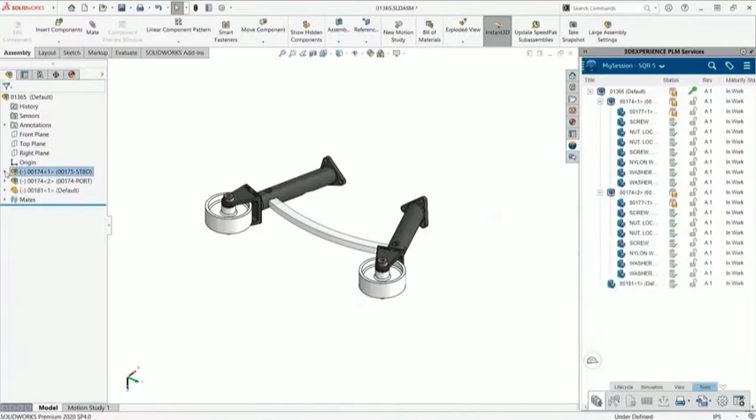Connect, collaborate, and tackle more challenges together. Sit back and take in everything new in SolidWorks 2021 and 3D Experience Works. I can't wait to meet you on the platform.

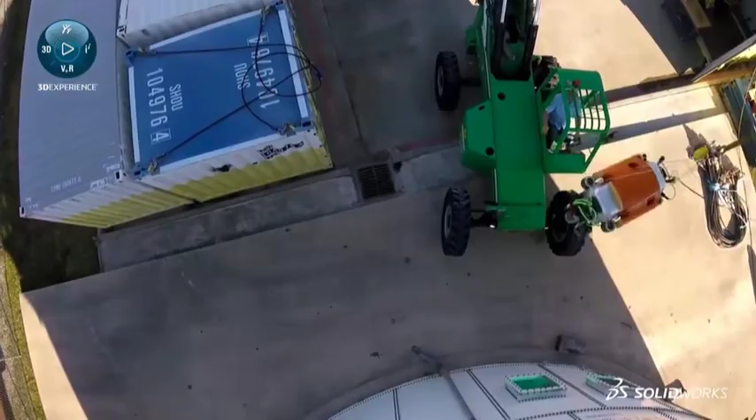Tackling the inspection of dark, harsh, and sensitive environments is the specialty of Square Robot, a startup based out of Boston, Massachusetts. Using advanced submersible robotics lowered into a petroleum storage tank, they autonomously inspect these environments for defects in the storage vessel using state-of-the-art sensing technology. By being able to use robotics for this task, they have reduced costs for their customers while improving accuracy.

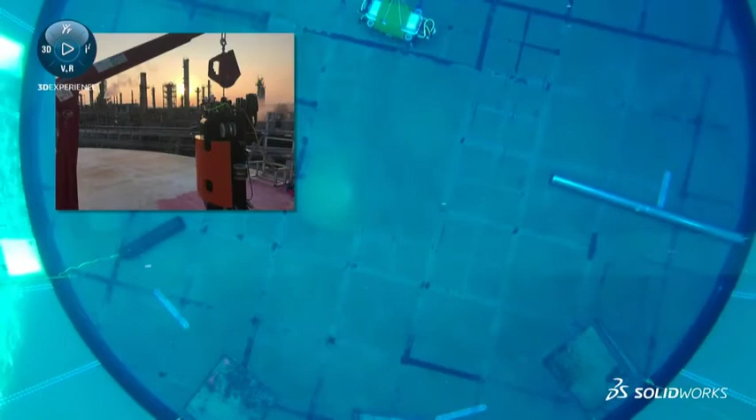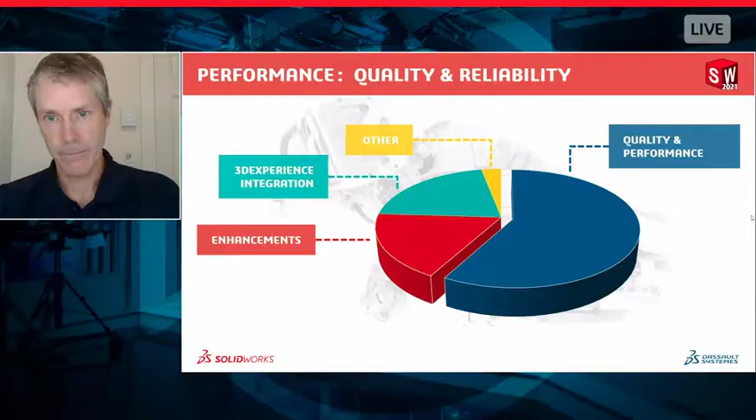Sure. I think the next slide shows bugs come in and they have all different kinds of bug type. Maybe it's a workflow bug, maybe it's a behavior bug where it's not functioning properly. So there's all different levels of bugs, and we try to categorize things so it helps us prioritize what to work on. And we have other metrics that help us prioritize related to the number of customer hits on a bug and how critical it is and so forth.

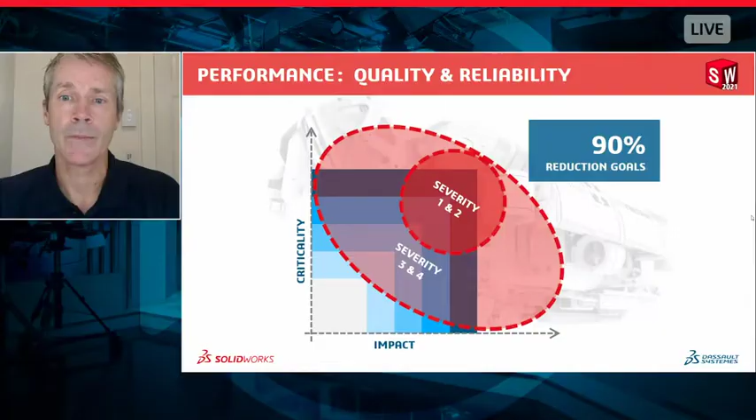You've shared some feedback with me and some data with me over the past about what this means in terms of our investment into this, and customers will really gain an immediate benefit from this. One of the things that we see this year is a substantial increase in the number of these bugs that you guys have closed.

So these aren't necessarily things that have a button associated with them or a feature associated with them. This is really just the software responding and acting more how our customers anticipate it will. Is that correct? Can you clarify that a little bit? These aren't necessarily features that improve performance or quality. These are just fundamentally making the software work better, correct?

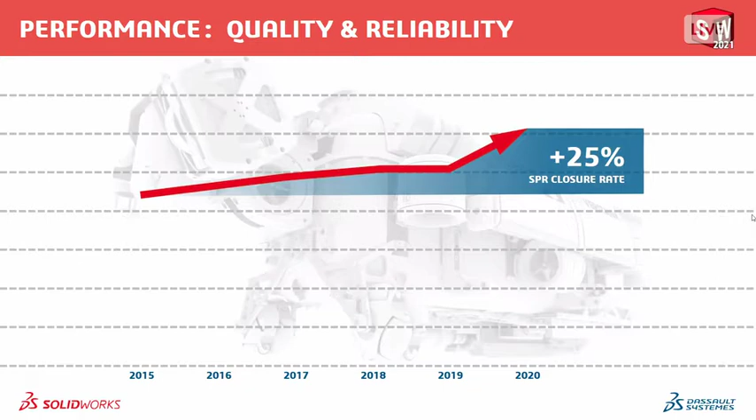True. Yeah. What we're showing here is really bug related stuff, not necessarily performance. There are performance bugs, but this is a graph showing the quality related stuff. And I looked back at it to see how we're doing with this renewed focus here. And I looked back 10 years. Developers have actually fixed more bugs in the past year than any time in the past 10 years. And you can see the graphic here. We're not showing 10 years, but a 25% increase over what you might have felt 5 years ago.

That's going to make for an amazing release for everybody using the software. Now, one of the things that we also want to talk about is performance. And something we introduced last year was something called enhanced graphics performance. Now, this is something that last year was an optional feature inside of the software that you could enable or disable. Can you tell the viewers at home who maybe don't have SolidWorks 2020 yet, or maybe haven't enabled this, kind of what enhanced graphics performance is?

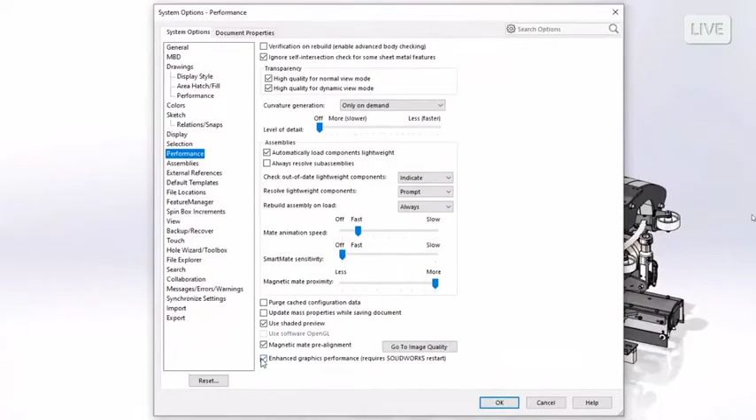Sure. Yeah. So we took a multi-year effort to basically re-architect our entire graphics engine, and that's what you would see in the model screen area, not the UI. It's the part and assembly display window. So we've re-architected that. We've had a team of people working on this for quite a while. As Jeremy said, we rolled it out. Actually, we rolled it out as beta in the software in 2019. It's available to everyone in 2020. You can turn it on. And in 2021, it is on by default now.

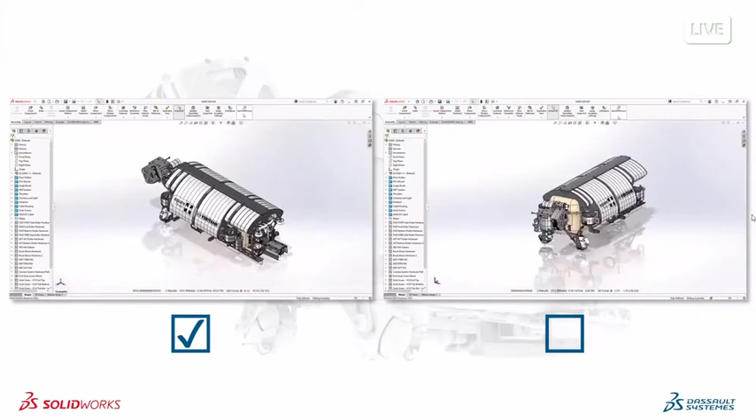And you can see here some of the performance improvements. So the graphics team has done a fantastic job. And what you will see is a performance improvement. That's the biggest impact that customers will see. Yeah, so if you haven't enabled graphics performance, I highly encourage you to do it. You'll see a lot of places in the software where it's being impacted.

New in SolidWorks 2021, we're continuing to augment enhanced graphics performance. One of the new things that we've seen is better leveraging the GPU for calculating things like silhouette edges. I believe that's one of the new things here as well, and hidden lines removed and hidden lines visible mode. So, kind of like what you saw there, we're continuing to invest in this technology. I mean, that's the plan moving forward, right, John? We're going to continue to invest in this graphics performance technology.

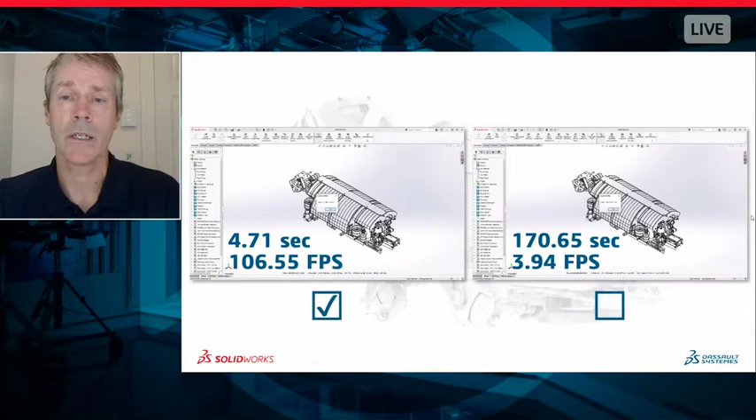Yeah, absolutely. Sid and the graphics team already have a plan. We're starting up on the next major release, and we've been enhancing it since we released it last year. So in 2021, we've added the occlusion culling, and we've improved the silhouette edges that you mentioned, done on the GPU, and we've done the re-architecture for drawings as well. So you'll see a very large improvement in the performance for drawings.

Yeah, so occlusion culling is interesting. The video we had on screen is actually something with a special developer option, where we were able to freeze what was being rendered on screen. So it's actually really intelligent. So not only are we letting the graphics card handle a lot more of the work being done, but we're also being much more intelligent about how we're doing things there.

You had also mentioned drawings as being an area that we're focused on. New in SolidWorks 2021, all this great technology is now being handled in the drawings environment as well. So users who are doing large complex drawings, you're sure to see massive graphical performance gains while you're working inside of your drawings. This is just an example again of what it kind of felt like without graphics performance enabled and what it looks like with graphics performance enabled.

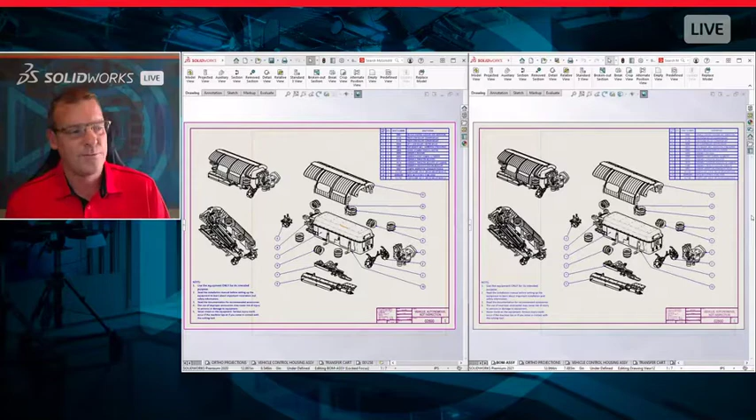This is really cool stuff, John. I know that Sid is really the guy responsible for this, but I think you've iterated it. This has been a long-term commitment, and I think our customers are really going to benefit from this for the long haul in what we're investing into this.

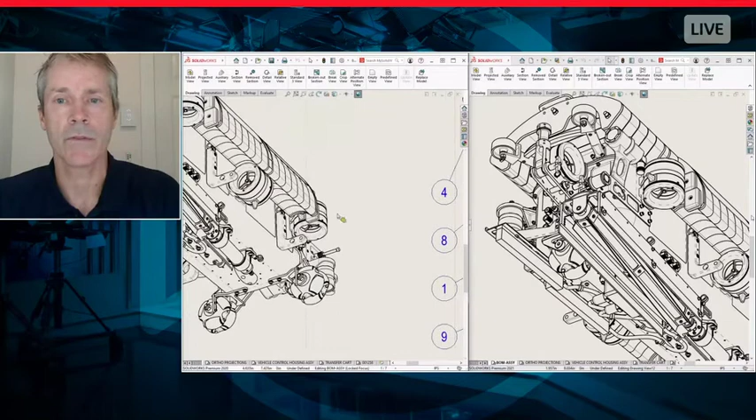Yeah, we've got a great team working on it, and it's been a huge focus for us for the past couple of years. And it's really nice to see it hitting the street, and on by default is great, and we've seen a lot of feedback during beta. And people are feeling it. You're gonna feel these performance improvements this year, especially in drawings, since it wasn't even enabled last year.

Yeah, so for anybody who is interested in learning more about this, you will want to make sure that you have the latest certified graphics drivers for your certified graphics card enabled. You can go to the SolidWorks support webpage to check that your graphics card has the latest graphics driver. I believe OpenGL 4.5 is the one requirement that you have to have in your graphics driver to really take advantage of all of this.

So, yeah, John, this is really exciting. I mean, go ahead. I think you mentioned it already, but it will take advantage of the GPU, which is a change compared to several years ago, right? We wouldn't always take full advantage of the GPU. So the better card you have, the better performance you're going to get. We are maximizing the GPU, which is a critical piece of your machine.

Yeah, customers who invest in a really strong and powerful graphics card are definitely going to see big performance increases with this.

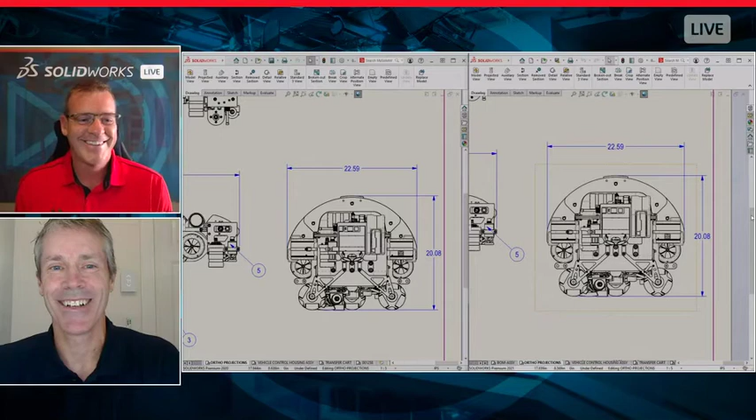So, John, you guys are kind of at the end. You guys are wrapping up your development cycle for SolidWorks 2021. Do you get to rest, or what's happening now? Or are you diving right into the next release? We are diving in. We have our R&D kickoff meeting on Monday for what we're planning to do with 2022. So the planning is done for the first portion of it, and we're starting work next week. So exciting! All right, keep going, John. Well, yeah, I mean, it never ends.

Well, hopefully we have you here again next year when we're looking at SolidWorks 2022 at this time. Really excited for this release. Let's not worry about what's going to happen a year from now. Let's focus on the great release here. John, I want to thank you for being here.

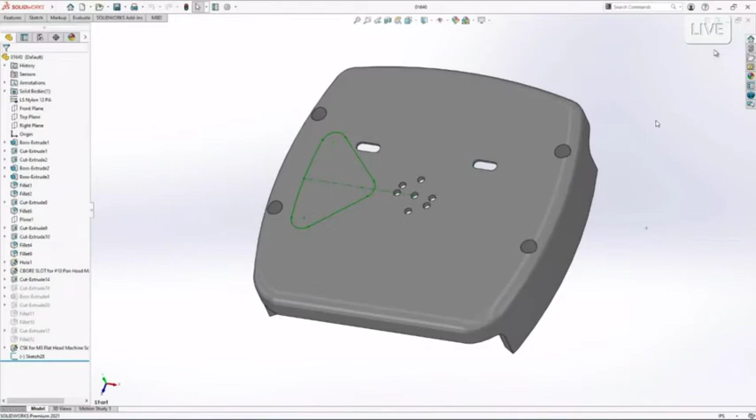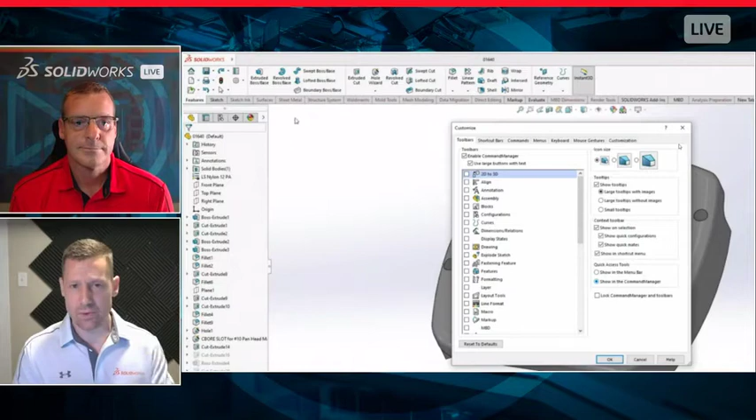If we want to get even more stealthy, there are some items at the top of the screen, our quick access tools, that we might also want to remove from the user interface to reduce clutter. So here we can put those in the command manager now, and those are hidden from the screen as well, minimizing our user interface. Now, like you said, we still have access to all of our tools at the top of the screen, but a better, faster way to work is using the S key keyboard shortcut, which most users will be familiar with.

New in SolidWorks 2021 is the ability to search for these commands, rather than having to pick through a big list of commands. So we can search through those. We can add commands like the circular pattern to our toolbar. We can customize our toolbar all over the user interface very simply.

And so here you can see I'm ready to work. I've got all my commands right where I need them, right at my fingertips, using that S key keyboard shortcut. That is so convenient. There's so many times where we're wanting to customize our interface. We're looking for the command that we want to add to the shortcut menu. This makes it so much easier.

And for those who might not know this, you not only have the shortcut menu, but you also have command search in the upper right-hand corner. This just really brings that whole, I don't need to move my cursor all over the screen. It's really going to make me focused in on my work.

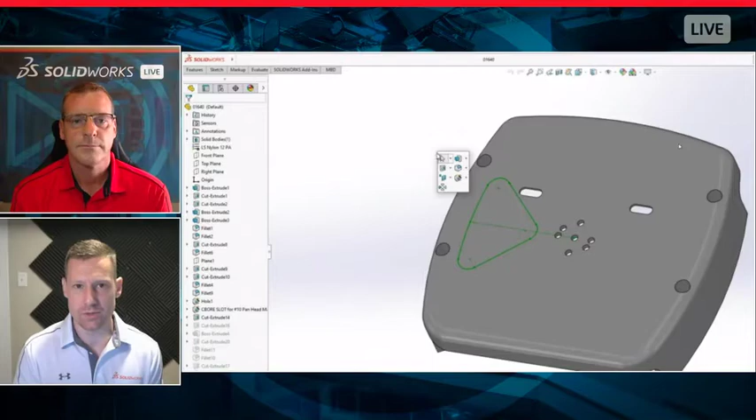Absolutely. And yeah, as you'll watch me perform some of these tasks here, I'm only going to use that S key shortcut toolbar, as well as a right click menu. So here I'm just going to create that cut pretty quickly, through all, and then we'll use again our S key keyboard shortcut here to pattern that around that face and confirm that.

So not only do we not have to go back up to the command manager to grab those tools, because we were able to effectively customize our user interface, but I was really able, like you said, to just focus in on my design and get to work and be very productive with that.

So now I see why you actually hid the command manager with that new option. That's because you're able to just do so much with the shortcut menu right there. You really didn't even need to access the command manager while you were doing that.

Yeah, that's right. And one last thing, and I really like this, I use undo all the time because I'm not perfect. I make a lot of mistakes when I'm modeling, but something that's really exciting here in SolidWorks 2021 is that if you undo a feature, maybe one too many, you have redo now. So you can just get those features right back. You don't have to recreate them, and that saves a lot of time.

Yeah, I think users will really appreciate that. I know when we introduced unlimited undo all the way back to when you did the file open, users were really excited about that. And I'm going to assume we can use the hotkeys Control Z and Control Y here. But I remember you could just undo and you'd accidentally go too far. So now you're saying I can roll that back forward if I had accidentally done that. That seems like a really useful thing for people who get a little zealous with a keyboard.

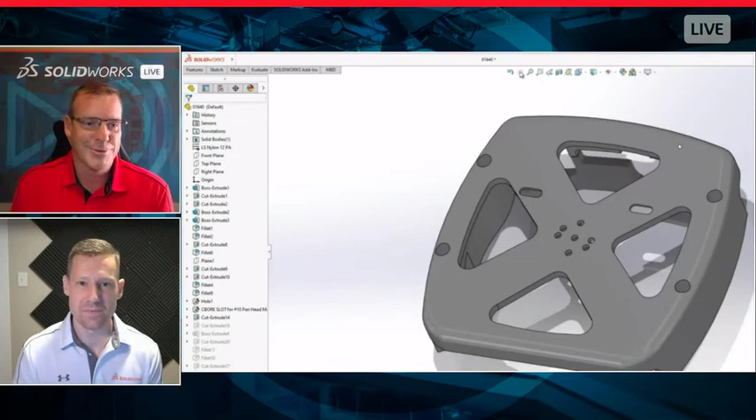Yeah, and this works for most commands in the part environment. So we have 60 plus commands that this works on. So with all of those enhancements, we're really just trying to help new users and advanced users alike customize and adjust their user interface to their liking, so they can just really focus in on their design and be super productive.

Very cool. Well, one of the things we mentioned early on in the broadcast is we don't have the time to show every new feature coming in SolidWorks 2021. So when it comes to the user interface, Mark, was there anything you didn't get to show here that you would encourage people to go attend a reseller event to learn a little bit more about?

Yeah, there's definitely one. There's this mechanism now where when you want to edit a dimension, instead of opening the property manager first, it just opens the modify dialog first. And it sounds like a small thing, but because you perform that action so many times in a session, even just a couple of seconds here and there really adds up to a lot of time saved. It's a really amazing enhancement, something we didn't show today. And there's a bunch more.

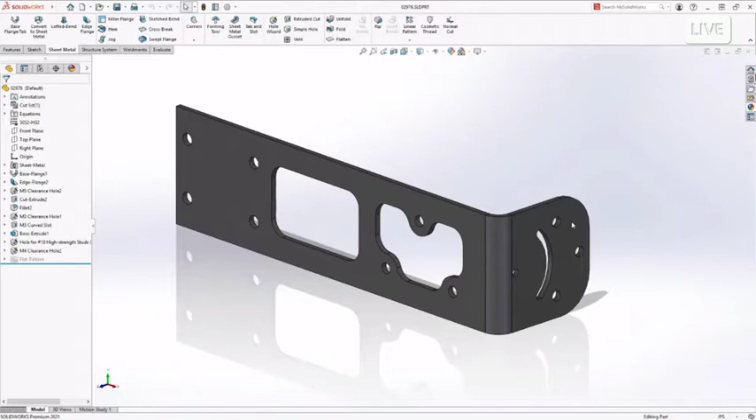Yeah, so let's go ahead and get started. In the area of curved edge flange, we've always been able to create curved edge flanges, but those curved edge flanges had to originate from a planar face, like those ones on the right there. Now in SolidWorks 2021, these curved edge flanges can be created even around areas like the bend area there. So you can see the curved edge flange, we get a nice, beautiful preview showing how that's going to go. So non-planar, curved edges around non-planar faces, you're going to be able to create those.

All your customization tools are available, your position, your dimension control, all that stuff is there. So this is really good. It'll really stiffen this bracket, and we know there's going to be some stretch in that area, but this is what customers really wanted. Of course, we can flatten this and send it out to DXF, or send it over to fabrication. So that new curved edge flange, something customers have been asking for a long time, is really valuable.

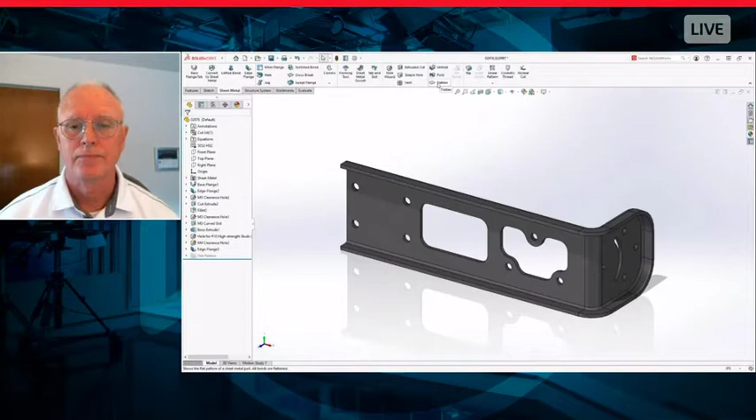Yeah, this is going to open up a lot of new design possibilities for our customers, being able to overcome some challenges that maybe they had in the past. Are there any other examples you can think of where the curved edge flange is going to come in handy?

Yeah, so that's a really good example for when you're trying to stiffen a bracket. In that case, we're adding a lot of stiffness to that bracket. It's also good for things like enclosures or covers. In this case here, we want to protect the electronic equipment on the inside.

These are fully editable. We have some curved edge flanges in here, so just change the flange length, change the direction, change the angle. Everything is fully editable, just like any other edge flange you're used to. And of course, we can flatten this as well, and you're going to get the correct flat pattern so that you can go ahead and manufacture this part.

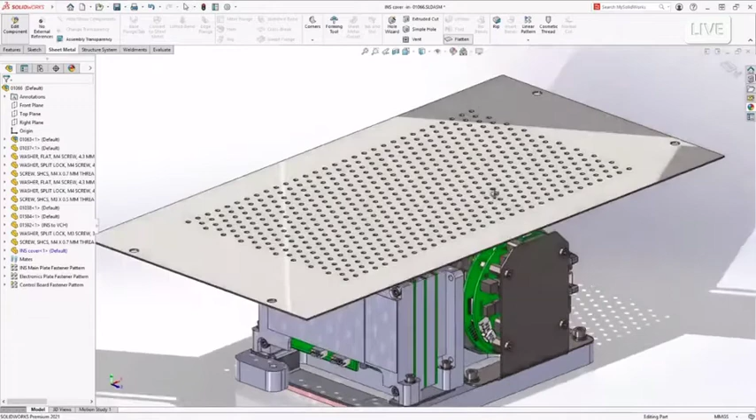Well, this is some really cool stuff, Mark. I like the sheet metal environment a lot, but I have to say, early on you mentioned the weldment environment as well, and I really, really like the weldment environment. What are some of the new things that users can expect in 2021 when it comes to working with weldments?

Well, we've got a couple of things I want to show here. When you're working with weldments, it's common to use multiple weldment profiles. Here we have a 2x2 square tube, and the rest of them are 2x3 rectangular tube. And we've always had this great tool to do your corner trims. In this case, we have two end butt types where you can see how they trim to each other in the different areas.

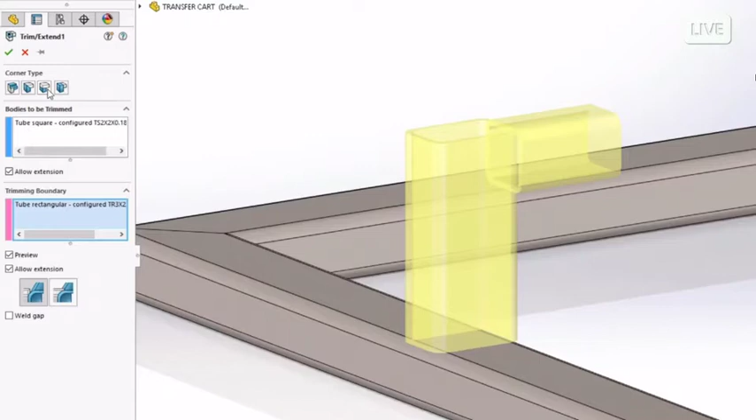But we also have a miter trim. This was always problematic when you were miter trimming two cross sections of different members, two members of different cross section. Now we have a new option in the property manager that's called a flush miter trim.

Full flush miter. So you can see what happens when we do that.

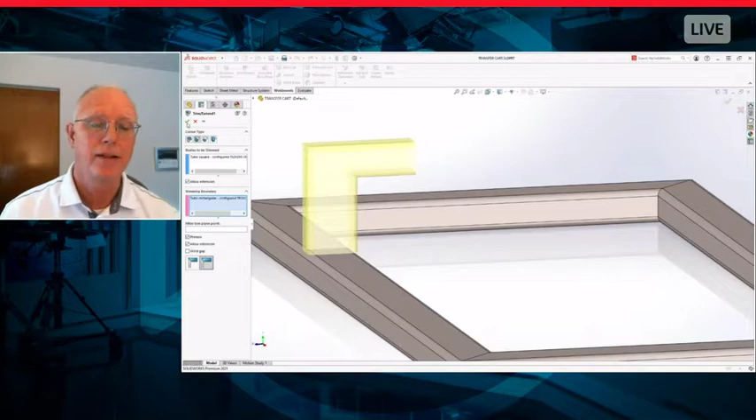Think about all the time that was saved when you tried to create these in the past. If you had that equal angle miter trim, you had to go back and say, I don't want it to be equal angle, I just want to make those two tubes flush. So you had to do extra work, sketch and cut those two bodies individually. Now it's just another option in the miter trim tool. That's really, really pretty cool.

That's a big time saver, talking about the workflow you used to have to do there. Not only that, it creates all these other features that you then have to manage. I love how this is all contained right within that mitered feature. It's really going to simplify things.

Now, Mark, you had also mentioned the ability to do some cool stuff with the user interface here. For this particular part, let's say we want to paint it a specific color. We can go into the color palette and choose any variety of colors, have multiple color palettes, choose from the spectrum down there and define our color. If we know the RGB colors, we can key those in. But oftentimes this color is specified by a customer.

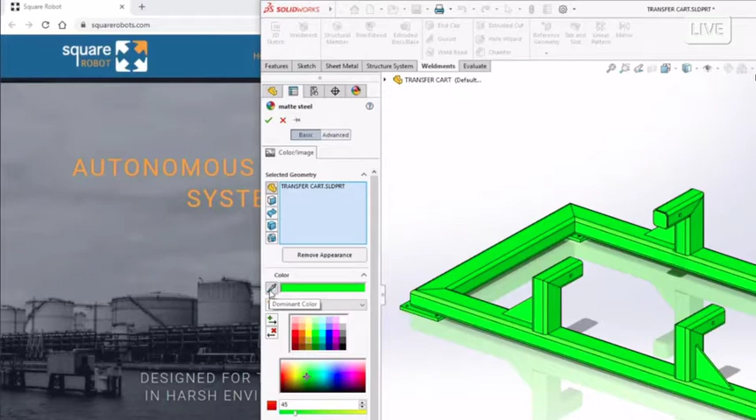Here we have the Square Robot webpage. You go on their webpage, read about their products and initiatives, but that color right up there is the one that I'm really interested in. So now in SolidWorks 2021, we have this new option, a little eyedropper there, a color picker. I can just go ahead and grab that, drag it onto the color on that web page or any image that you have, and it's going to apply that color. No need to use a third-party program or extract RGB colors.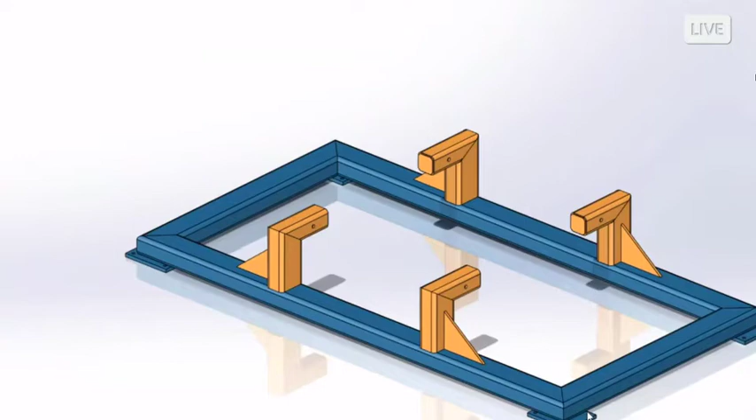Customers, it seems like from the forums and some of the beta events and different events that we've done so far, a lot of people are really interested in having these custom properties with equations in them. In the past, you maybe created global variables and used the equations tool inside the property manager, then mapped that to a custom property. But in reality, it was a bit of a workaround.

Yeah, I mean, this really opens up whole new possibilities. Now, you had mentioned when you started this, you said cut lists as well. So we can use these in cut lists also?

Sure. We got a weldment here, and you can see there's 4 plates on the 4 corners of that. I want to know the total length of all those plates together so I can order the proper material. So here we'll just use a total length equation, and we'll multiply the quantity of plates times the actual length - these are just the bounding box length calculated from the cut list - and we come up with a little over 20 inches of that plate that I need to buy.

So that's very important, that information is there. Right in your equations, right there in your custom property, so you can capture this information. It can then go on your bill of material for those items as well. So that's really powerful there. It's just saving a lot of time of having to do all that extra work, maybe in the bill of material or in your equations in the property manager or in the feature manager.

Yeah, I recently had the chance to play with this, and it's really cool because now that custom properties are solving for an equated value and you have the number value, I've actually found you can also reference custom properties in equations now, so you can kind of go back and forth with them. There's a lot of things you can do.

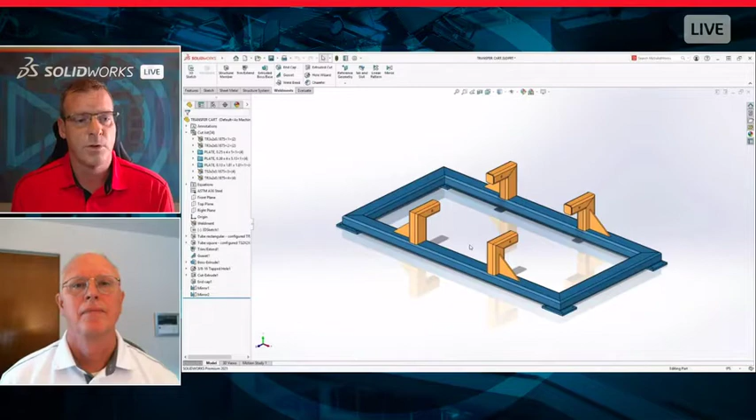Yeah, we did some things with the structure system tool. If you remember when I did the flush miter trim earlier with the weldments, that was something that actually existed in the structure system tool. And when you build structure systems, one of the benefits is you can put all different types of weldment profiles in there, and it doesn't really worry about it - it does that flush miter trim. But I do like working in structure system for big, large structures, and it's very good.

And now in SolidWorks 2021, there's a new manipulator that allows you to position individual structure members much easier than it was in the past. So, like you said, take a look, go visit one of your reseller events and make sure that you take a look at that new capability for that new manipulator for structure systems. It's really kind of fun to use.

All right, Mark, well, everything you shared with us seemed like it was a big time saver for everybody right now. What I want to do is, I think we're going to come back to you in a little bit to talk about drawings. I want to go back to Mark Peterson to talk a little bit about assembly. So we're kind of doing this user interface, parts, assemblies, drawings. Mark Peterson, welcome back. Hey Jeremy, thanks for welcoming me back to talk about some assembly enhancements.

Yeah, so I think assemblies are one of these areas that people, at least I do, I feel like that's the fun part of SolidWorks - building assemblies, getting to kind of see how all your designs come to life. What are some of the new things that users can experience in assemblies in SolidWorks 2021?

So let's get started by looking at this particular subassembly here. The bottom right-hand corner, you see a group of socket head cap screw and a washer, and we've mated that to the surface of this part. However, as you can see, it's kind of flipped the wrong way. So we want to flip that around. And naturally, for many of our SolidWorks users out there, we're going to go and flip that mate alignment. We're going to get this dialog.

And a lot of times, it would make sense for us to just click one of these buttons and get it out of our way. It depends on your workflow, but sometimes you want to say no here and manually go and adjust the mates yourself and the errors. Or sometimes you want to say yes and just allow SolidWorks to figure it out for you by choosing what mates need to be changed.

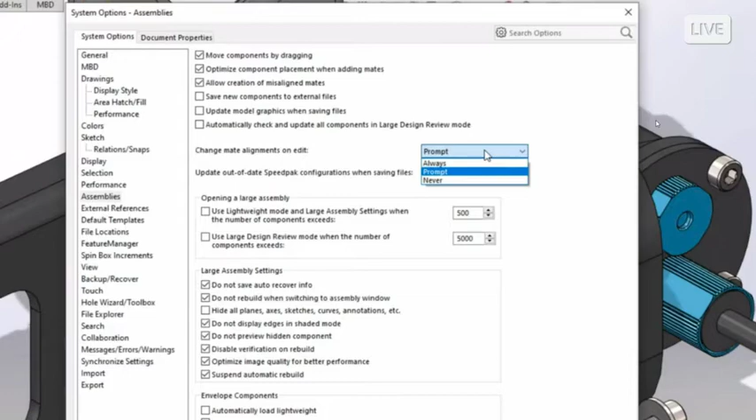Well, in SolidWorks 2021, we now have an option where we can say, I want this option to always be chosen, whether that's a yes or a no. Just tell SolidWorks always choose that option, and then you never have to see that ever again. Which I love. Anytime we see this sort of streamlining of workflows, allowing these dialog boxes to just get out of our way. So now that we have our options set to always, we just right click on our mate and choose flip mate alignment, and then we're ready to go.

Mark, I have seen this dialog box so many times. Like you said, 90% of the time, I just want to say yes, flip the components. The mate I just created is what I want. This is going to be a huge time saver. I don't have to click that dialog box. I don't even have to see that dialog box anymore. I love it. Yeah, absolutely.

And there's other defaults that we can set in SolidWorks 2021. So, for example, we want to mate this to the slot, and of course, in previous versions of SolidWorks, we could mate to a slot. That's not a problem, and we could choose what constraint we wanted, whether we wanted that to be free or centered in slot. Now in SolidWorks 2021, we can choose a default for that. I'll show where that setting is in a second. Notice we also can lock rotation like we would expect to be able to do with mates like concentric mate, for example.

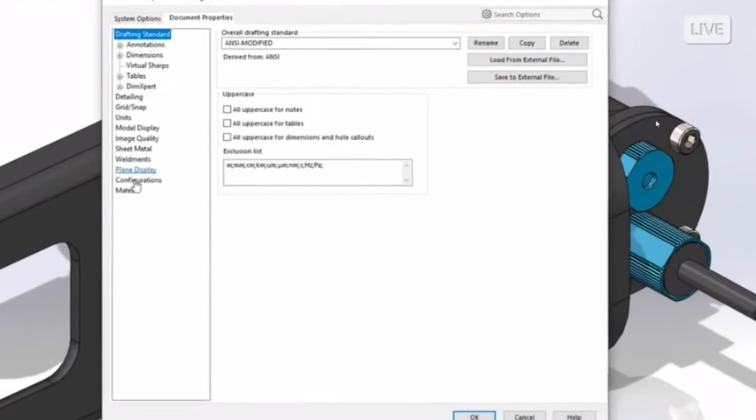So let's go here to our settings. We'll head over to the document properties tab and notice that we can now just choose which of those constraints we want to set as default. And that way, most of the time, depending on your workflow, you just want one of those options. Of course, you can always override it. So it's just a nice thing to be able to put in your document properties.

Yeah, I love that. I love all these things where I can set it up the way I work most of the time. One of the things you mentioned, that's a document property. So for the users at home, when you install SolidWorks 2021, you may want to update your templates. I always recommend doing this every release anyway. I always go through all the options, make sure everything is set the way I want it when a new release comes out. This is one of those settings you're going to want to update in the templates.

Now, Mark, one of the things I saw there on the screen is you had all this hardware down in the corner, but it was all different sizes. What was going on with that? Yeah, absolutely. So in the bottom left of the screen, we have a pattern of some nuts and some washers here. And in SolidWorks, when you're assembling, it gives you the flexibility to change one of those instances if you want. So the one highlighted in blue here is the seed of the pattern. And then we have these other component patterns here, and we can, of course, change those.

Now, in the component properties, we can choose to use the same configuration as the seed, and that can help there. But this is only 3 nuts and washers, so it's really not that big of a deal. But if we had tens or hundreds of these, we would want a little bit easier way to just set this the same for all components.

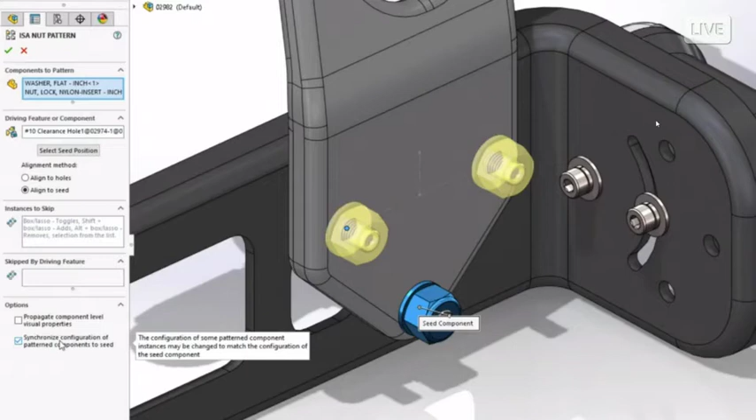So now in SolidWorks 2021, you can see here underneath that component pattern, we have the ability to synchronize the configuration of the pattern components to the seed, all with just one click. And once we set that, we can, of course, go back and verify that you won't accidentally undo that by going back to the component properties. As you can see here, those options are now grayed out as you would expect.

Now, finally, what we want to show is that if you do change that seed component configuration, it's going to propagate and update the other components in that pattern. Yeah, what I really like about what you showed there, Mark, is not only did it synchronize all those components, but it locked them down so that you don't run the risk. You as a designer can add that design intent: I don't ever want any of the pattern components to change to a different configuration. So I think that's great.

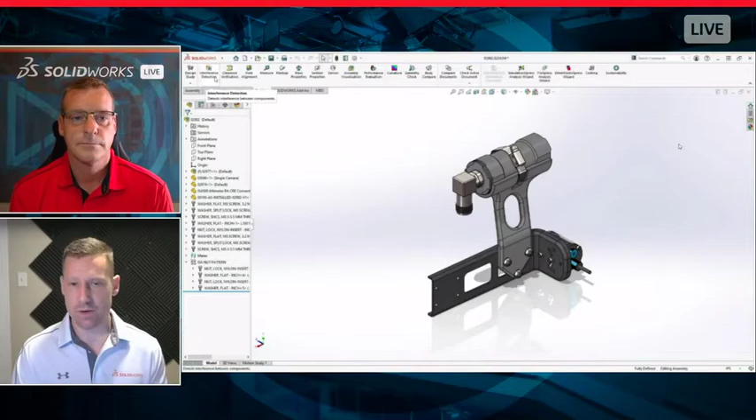What about different ways of sharing and communicating things going on in the design? Anything related to that, Mark? Yeah, some of the most powerful things you can do in SolidWorks revolve around evaluating assemblies, looking at things like the total mass of the assembly and that sort of thing. We also want to show here interference detection, and we've had interference detection for a long time. It just shows where components may overlap in 3D space, but new in 2021 is the ability to export this to a spreadsheet and even have the option to add thumbnails to that as well.

So once we save that out, we'll just watch as SolidWorks goes and takes some screenshots for us and populates a spreadsheet, which we see here. Now, this is really, really useful. You can share this digitally, of course, or you can print it out and bring it to a conference room and work with the rest of your team on it, depending on what method you want to use to communicate. But this allows everybody to get together and understand, are these interferences intentional in the case of, let's say, a press fit, or is there a design change that needs to be made, and who owns that design change? Yeah, that's great. I especially love that it has such a graphical element to it with the thumbnails.

Now, Mark, we talked early on with John Sweeney about performance being a major part of this release. What about performance in assemblies? This is one of the first places where users want to see performance improvements. There's general performance, things like files opening faster, but are we doing anything new in SolidWorks 2021 to help our users with performance?

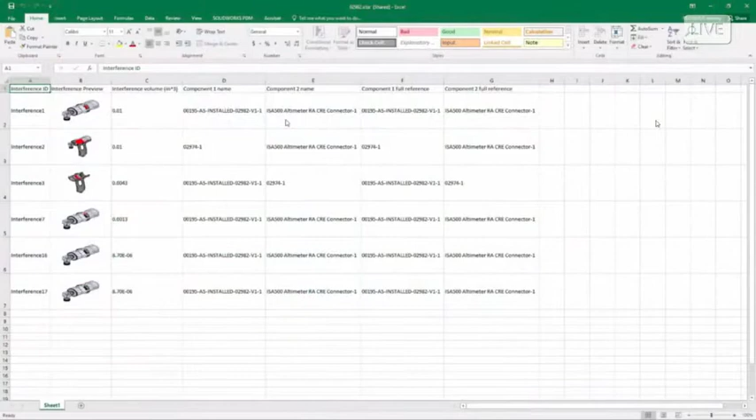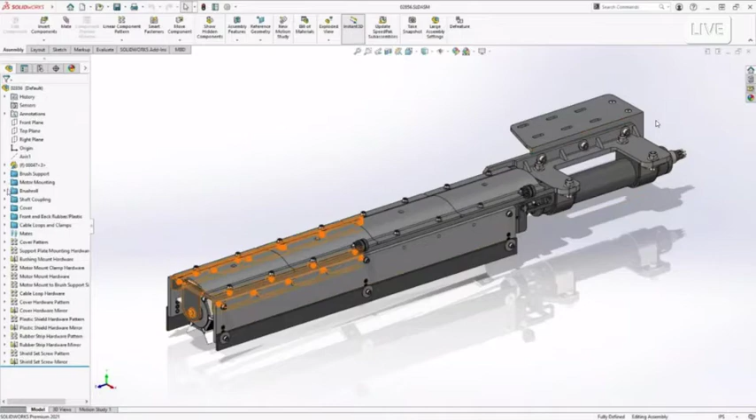Yeah, absolutely. I want to show you one of my favorite enhancements for assemblies in 2021. We've had the ability to open assemblies in lightweight mode for a while. And that changes the opening time from maybe minutes to seconds, which is amazing. But something that was a little tricky about that is if you wanted to resolve some components, you'd have to right click and choose each component to resolve so you could work on it more effectively. Well, new in SolidWorks 2021 is the ability to just select the component and expand it, and it automatically resolves for you. It just dynamically does it.

It's so effective, and it just makes me want to open every assembly with lightweight mode, because there's no disadvantage to doing it. You get all the benefit of lightweight mode, but when you need to work on a particular component, it dynamically resolves for you. Yeah, I think users who have experimented with opening things in lightweight might have been hesitant to use it because they're always having to right click and resolve a component. This just seems like it makes that workflow so natural.

Well, that's great in terms of general performance. What about tools to reduce overhead on my computer or things like that? Are we doing anything there? Yeah, absolutely. We introduced defeature in 2019, and just to briefly go over what silhouette defeature is, it allows you to simplify a component or an assembly into a representation of itself. So that if you wanted to, you could, let's say, send it to a partner you're working with and not give away all of your intellectual property, for example. But it can also be used to improve performance of top-level assemblies.

So what we're showing here is I have a component that I've simplified, but new in 2021 is the ability to save that component as a configuration.

Because before we'd have to save it out as a separate file, and this would make it a little bit difficult to implement into the top-level assembly. So as we see here, we're going to head over to that top-level assembly, and we see we've got our component rotated here underneath, and we just want to replace that with that simplified representation.

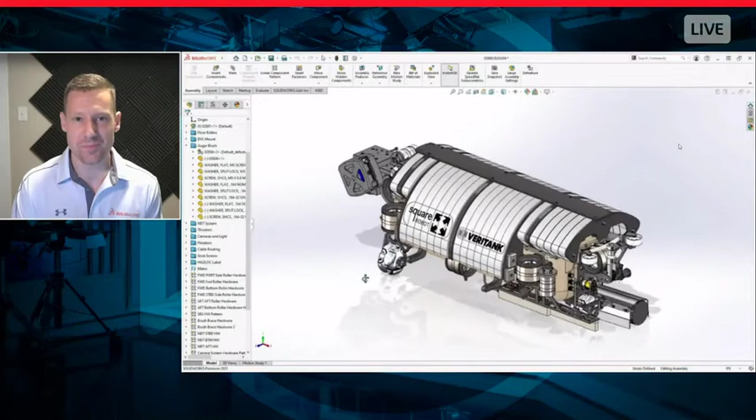New in 2021 is the ability to just simply right-click, use as defeatured, and it just quickly replaces that. No need to do any extra steps or use a convoluted workflow. It's just as simple as a right-click away. Yeah, I love that. Not only can I just right-click and change that, and that it's a configuration, it's also not a separate file I have to worry about.

So, that's it for me as far as assemblies. Again, there's a lot more. One of the things that we didn't show, and I really encourage everybody to go check out your reseller events, is there's a new way that we can kind of dig into circular references. And I know this is a more sort of advanced thing, but SolidWorks does allow you to make circular references, unlike some other software. And sometimes you need to do that.

But what if you didn't mean to? Well, now we have a capability that allows you to figure out those circular references, bring those to the forefront, so you can understand them more deeply and get those circular references resolved. So that's a really cool one. Looking forward to seeing those at the reseller events.

Well, great, Mark. It's been really good having you here today, sharing the user interface enhancements and then these assembly enhancements. I want to go back to Mark Schneider. We were just talking about performance. Mark, I want to talk about drawings and I want to talk about performance. What are we looking at new in SolidWorks 2021 when it comes to drawing performance?

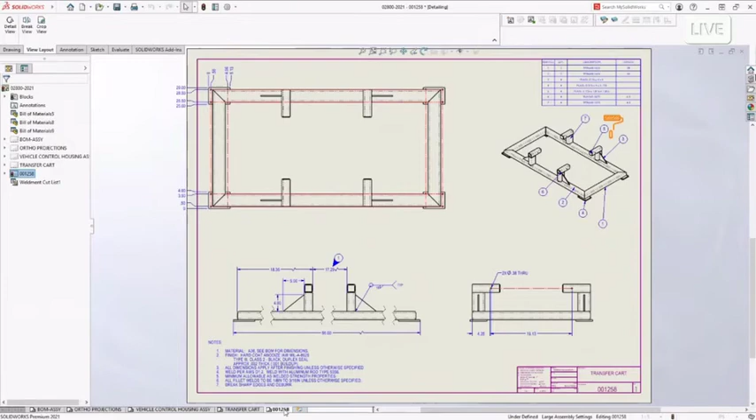All I need to do is send you the drawing. I don't need to send the assembly or the multiple assemblies and everything that goes along with it. All you need is the drawing. Because keep in mind, what you're actually working on when you open something in detailing mode is you're just looking at the line work there.

So it's just the line work on the screen, and it just makes it really fast. And all those graphics performance benefits that you and John talked about earlier, they're here in detailing mode as well as resolved mode or lightweight drawings as well. So basically what you're saying is I don't have to load that whole assembly up. It's opening kind of that last save mode of that drawing with all that line work. Man, that sounds like a huge time saver.

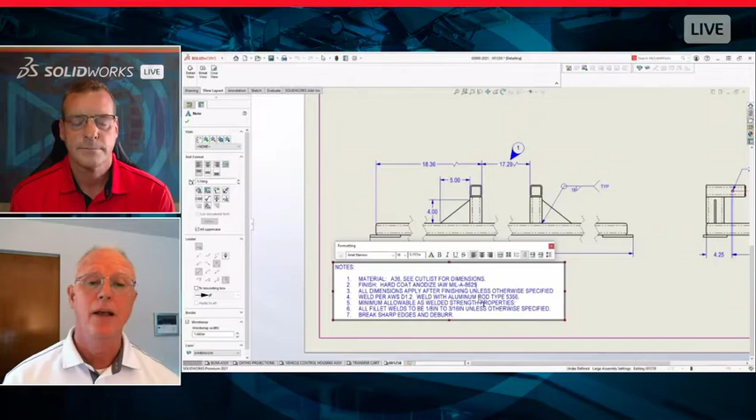So show us what's new in SolidWorks 2021 with this detailing mode. Yeah, so we were able to add notes and edit those notes last year when we introduced this, but now existing notes can be edited too. So I can change this note here, remove some information, key in new values if there was a mistake made, and I'm able to quickly edit those notes. So that's one of them.

Broken views, you can see this front view here. It's got some breaks across it, and also some foreshortened dimensions there. So these are the breaks that exist in that view there. But the top view hasn't been broken yet. Now in SolidWorks 2021, we can add detail views, break views, crop views, and even an empty view if you just want to do some sketching.

This behaves just as you would expect. Remember, we're just cutting the line work on the drawing here. So think of it that way. All we're doing is cutting that line work, and we're able to add that broken view. All your tools that are available for your break line styles, your gap size, any of that stuff is available as well. And you can also add crop views and detail views, and we'll show that in a little bit.

Yeah, this is great. This is really going to change the way people detail their drawings. But fundamentally, when I first create the drawing, I still want to do that like I would a normal drawing, right? I set my initial views. Once they're done, I can save it and then just open it up in detail mode. That's correct. You can't create new views. You can't create section views. Section views still require the model to actually cut that cross section.

So if you want to create a brand new view, no, but a detail view or a broken view, all we're doing is manipulating the existing view. A crop view, we're manipulating an existing view. And detail view, we're just magnifying an existing view. So all we're doing is leveraging that information. Obviously, if your assembly went through some change process, you're going to want to open it up lightweight or fully resolved so that all those changes are reflected in each of the individual views.

One of the cool things about detailing mode, Jeremy, is all these edits that I'm making, when I hit save, I save this drawing. You can make these changes, send it back to me. Next time I open it fully resolved, all these changes are going to be there. Cool. You had mentioned detail views. Can you show us how you make a detail view in this detailing mode?

Yeah, but first we can see these ordinate dimensions that we have up here. We've got some ordinate dimensions that were already existing there. If we want to add some additional ones, right on the right click now, we can add existing ordinate dimensions to this detail view here. So that's kind of cool. Detail views, if we want to add some information in this lower corner here, it's just adding a detail view, very similar to the way you would do it if your drawing was lightweight or fully resolved.

The other cool thing, Jeremy, is people want to create hole callouts. Hey, I got these holes, I want to make a detail view, hole callout there. No problem. Foreshortened dimensions. It knows the total length of that line. It knows how to create that foreshortened dimension there too. And we got some other things coming with dimensioning too. I can show you. Yeah, I'd love to see it.

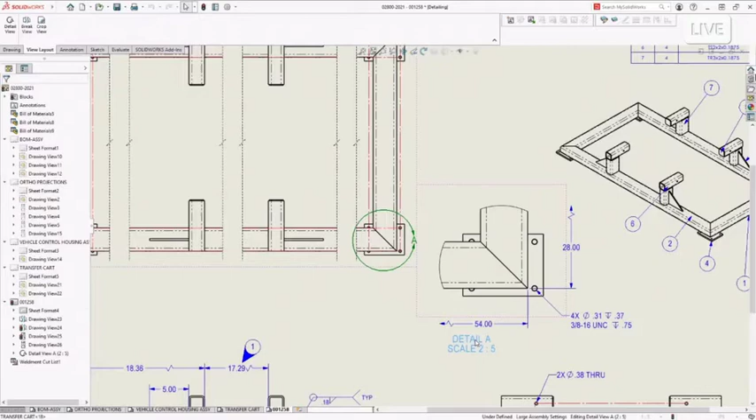First question I have is, can I edit existing dimensions in detailing mode? You can edit dimensions and change their properties, but you can't double click that 28 and make a dimensional change. Remember, you have the line work on the screen here. That's all you're working with. You don't have the full model behind it like you would inside of SolidWorks, but you can edit those dimensions and make property changes.

Let's take a look. I'll show you. So down here we have this dimension 19.13. That's critical for how this thing is defined. Maybe we need to put some tolerances on that. You notice in the property manager, I can change the tolerance. I can change its precision.

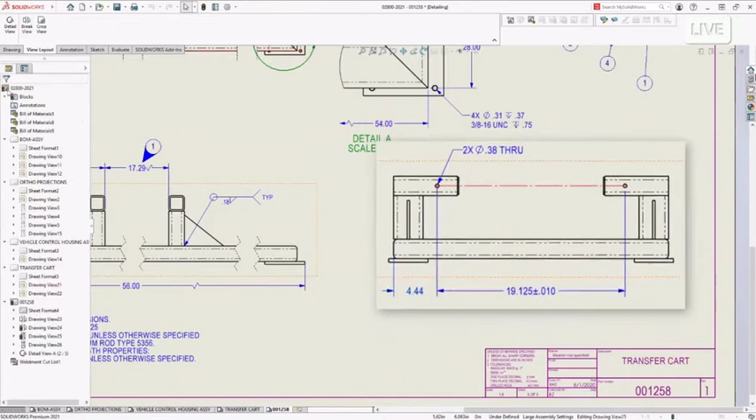This dimension right here is not dimensioned right. It's dimensioned to the outside of that hole there. Instead of that, we're going to dimension that to the center. Notice that in the property manager, all the tabs are available, so I can make all those changes that I might need to make. So those are just a couple of things for detailing mode that we added and extended.

And actually, Jeremy, some of these things have been backported into the latest releases of SolidWorks 2020. So if you're using SolidWorks 2020 today, you'll be able to take advantage of some of these editing capabilities in detailing mode as well. That's great. That just shows a lot of value in your subscription. You can go download that latest service pack and already start to take advantage of some of this stuff. This is going to be great for users.

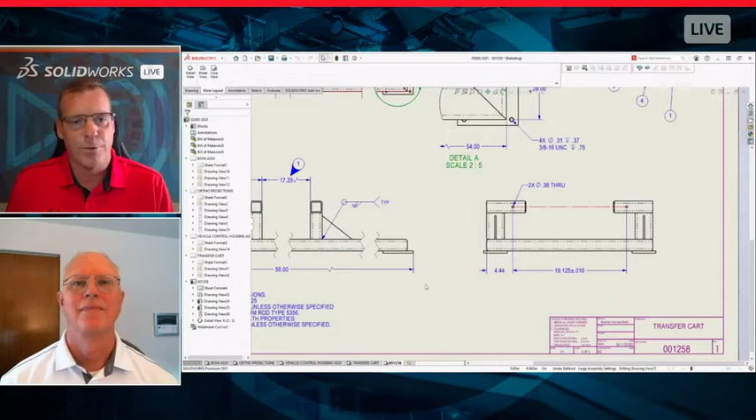I've been asking everybody, is there anything you didn't get the opportunity to show today that you would encourage people to go to a reseller event to learn more about in regards to drawings? Yeah, a couple of minor things you can see over on the left-hand side of this drawing. There's a VDA balloon. VDA balloons are now supported, and those get pushed over into SolidWorks Inspection. That's very important for a lot of the European automotive suppliers. They needed those VDA balloons, and that got a lot of interest from people in Europe.

All right, Mark. Thanks for sharing all this exciting new drawing stuff with us. We've looked at this design process, and one of the things we skipped over, which should have happened before drawing, is simulating your designs and understanding how they're going to perform in the real world. To help us understand what's new in SolidWorks 2021, I want to welcome Michael Steves, our resident expert. Michael, welcome.

Hey, Jeremy, thank you. I'm happy to be here. We're going to talk about SolidWorks Simulation and Flow Simulation. I have to start off by saying 2021 was a big release for SolidWorks Simulation. It's easier to use, it's faster, and we've improved the accuracy as well. So new users and existing users will find something I'm sure they'll enjoy.

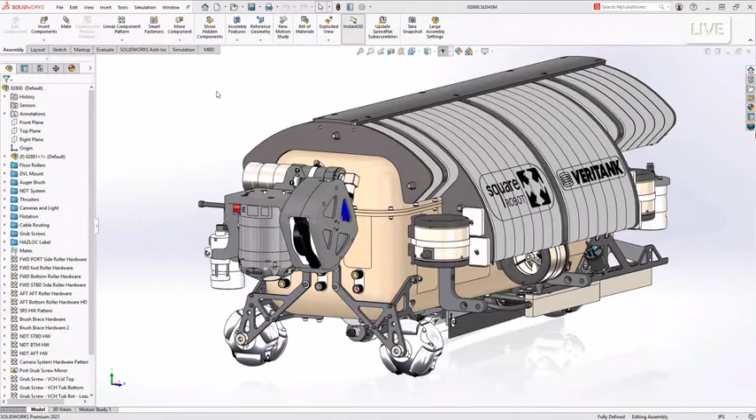We have a structure in the corner there with a few plates and some hardware, and doing a structural analysis of this, we'll assume everything's bonded together right away using the global setting. New in 2021, there are some additional properties for gaps and stabilization. Again, the default properties here are doing a lot of work for you as the user.

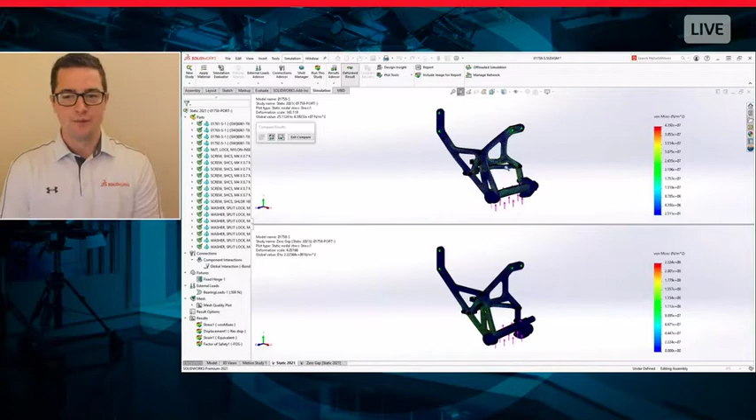Overcoming some common challenges that stem from the CAD geometry. In this case, there are small gaps between some of these components. Let's compare this to another study where we've set those properties to zero to mimic previous versions. As you can see, we've easily been able to overcome this by automatically capturing the interactions between those components, even though there were gaps between the CAD geometry that would not have been automatically detected before. Now in 2021, they're automatically detected, so you can get good quality results right from the get-go.

Yeah, this is one of those instances where I've always wondered how to deal with those gaps and things like that. I might not necessarily know all the settings. This feels like, for somebody who's first getting into SolidWorks simulation, or even somebody who's been using it for a long time and doesn't want to be bothered with that whole setup process, a big time saver and an aid to help make sure I get my simulation set up properly.

Well, sure enough. And I know there's a lot of questions on, okay great, it's faster, but how accurate is it? That's where the contact definition, how the contact is solved between components and those interactions, is greatly improved with 2021 as well.

If you take a look at the image on screen, we actually have two types of meshes going on at once: a draft quality mesh and a high quality mesh, and those are interacting. In 2021, we added support for mixing draft and high quality elements, one reason being to reduce overhead and optimize our analysis. So we're high quality where we want to be, and we can lower the quality where we don't necessarily need to be as accurate to solve the overall assembly. What that means is you can solve more types of problems on your machine and also get a faster result without sacrificing a lot of quality, especially in the areas of concern.

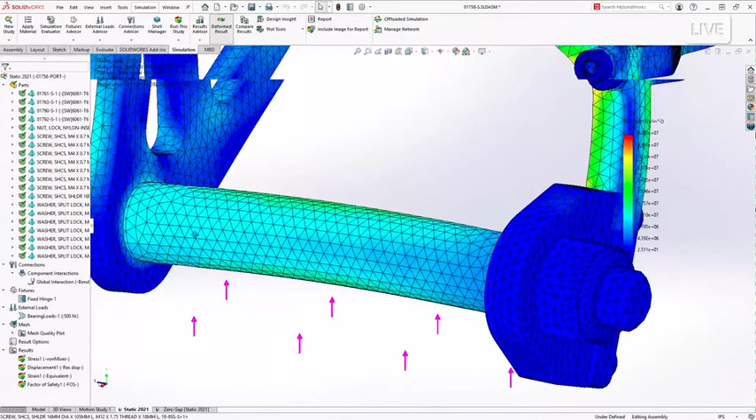Let's take a closer look at some of these areas in the model, because with 2021 we've added additional support for where mesh nodes aren't lining up. There's also been geometry correction added for various types of interactions between these components, so we're accurately capturing the interactions there. Again, nothing more that you need to do as a user - it's just giving you that improved accuracy.

But of course meshing does come into play. So new with 2021, there's a new diagnostic tool to isolate these poor quality elements, making it faster than ever before to identify those elements and fix them. There's also a built-in mesh helper to optimize the mesh.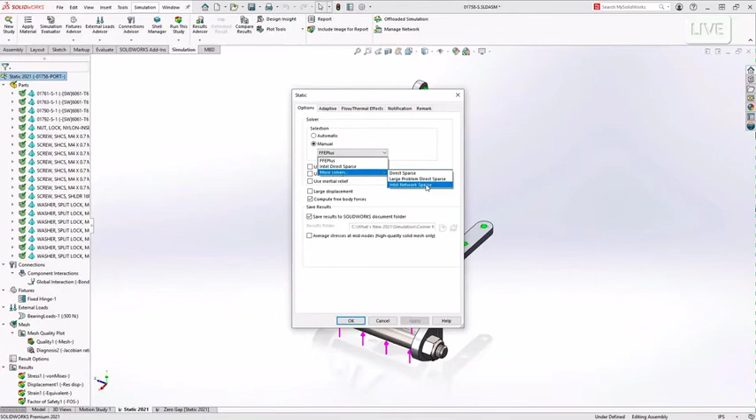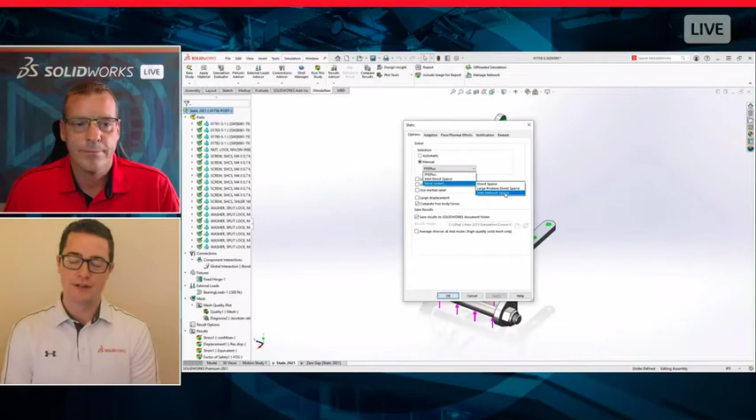The last thing I want to mention with simulation is if we take a look at the properties of the study, you'll notice it's been simplified. Because of some of the changes to the definition of contacts and interactions, we don't necessarily need some of these extra options in the user interface. So in the case of picking a solver, that's the only one there - the automatic solver. The algorithm has been optimized based off of the study you're trying to solve, and also the computer you're using to solve it. It's doing a lot of balancing automatically to pick the right solver for you. But if you're an advanced user, you still have those additional solver types available.

That seems like it's really going to streamline my workflow, anybody's workflow using SolidWorks simulation. I love how the automatic solver is going to do a better job understanding what hardware I have available to me in combination with the type of study I've set up - it sounds like it's going to help me get to my end results a lot faster.

Now, one of the things you mentioned earlier is simulation and flow simulation. Simulation is really exciting - what are we doing new in flow simulation in SolidWorks 2021?

Yeah, I get really excited about this one. With 2021, we're actually combining - the one I want to focus on here is the combination of two types of physics we've been able to solve before, and that is free surface and rotating regions. So we can see some of the results here already. Just being able to have that rotating region and that free surface, fantastic.

Think of just the mixing simulations that you can do. So let's take a closer look at how this was set up. Especially with this thruster, we're interested in calculating the torque and power requirements.

Since it's rotating, we set up a rotating region. Keep in mind the angular velocity that's been defined here, we can set up a dependency so we can ramp up that power or that speed. Also, when we jump into the general settings or the wizard for setting up a flow simulation study, we can turn on both free surface and rotating regions. We get into the dependency for the free surface, and we can specify the fluid or liquid-gas interaction and those default values.

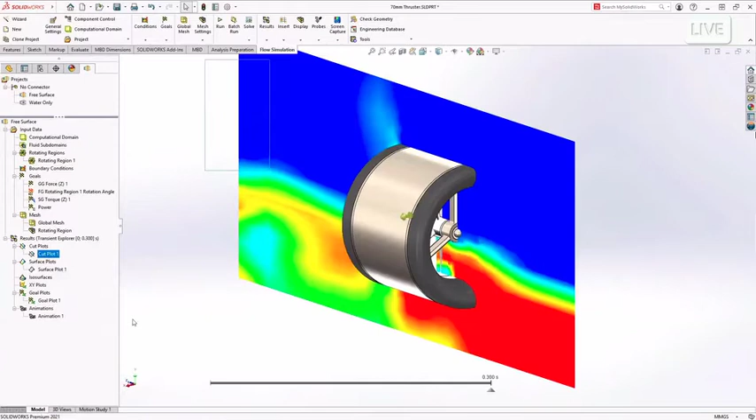From there, we set up some goals, we mesh, we solve, and we can start processing the results. And especially with free surface, we're doing a transient analysis. So the transient explorer really makes it easy to visualize these results, especially the mixing that's going on here.

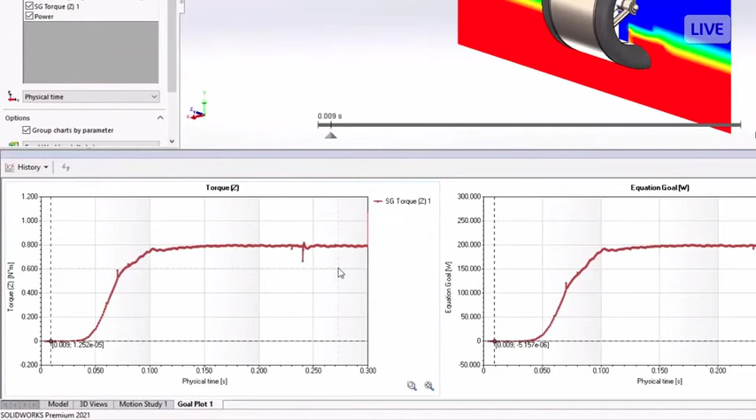But again, what about the power and torque requirements? We can use the goals that we created in the study, and we can look at the history to verify that ramp up. But what was the maximum power requirement? New in 2021, there is a new option in the summary to show you the maximum value and when it occurred. So it's faster to get results, or we can solve more types of studies, and it's faster to process your results now with Flow Simulation 2021.

Wow, Michael, I'm just floored, especially by that mixing, doing the rotational calculation along with the transient, with the materials there. I got to ask, what can I mix with this? Can I mix up myself an Arnold Palmer or something like that? Yeah, just specify the initial volumes of lemonade and tea. And then we just have to figure out how you're going to mix it. Maybe a blender?

Sounds like that'll work. Now, Michael, obviously we didn't get to show everything new coming in SolidWorks Simulation 2021. Anything you didn't get to show today that you really wish you had the opportunity to, that you'd like people to go attend a reseller event to learn more about?

Yeah, especially with a lot of product development going on. There's a lot of electronics, which means smart devices, which also means there's a lot of heat being generated. How are you doing that thermal management? One other enhancement in Flow Simulation 2021 is being able to do an energy balance much easier than before using the flux plot. That's something we introduced in the previous release. It's been enhanced with the click of a button, giving you a nice energy load balance to verify that your study has converged, to see that all the heat going in is properly validated through the analysis, giving you an accurate result for your study.